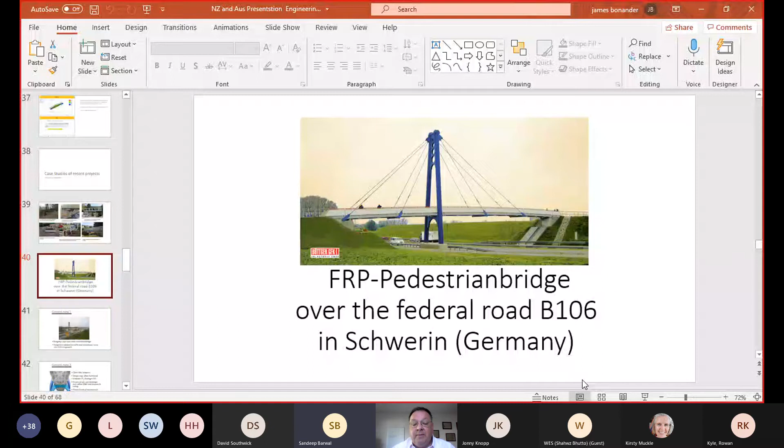What I want to start with is, I want to talk about the use of FRP. Let me go back to something simple. So I'll start here. I want to talk about the use of composite structures in civil uses. What we've been doing with the construction of composites is creating a lot more pedestrian and bicycle paths. And 25 years ago, our partner and founder, Arnie Brutker, started building these bridges in Germany. And what we found is these have become a very, very successful product in that they're very, very durable.

So the benefits of going with the composites is, one, they're 75% lighter than steel. So when you look at construction and handling in the field to build, they're much lighter. They're 30% lighter than aluminum.

They get very high strength. You're talking about 4 times the tensile strength of aluminum.

The shipping costs are quite low. Because it's lighter, we don't need quite the same crane capacities and construction equipment in order to install them.

It also doesn't suffer from the problems that wood, concrete, and steel do. We don't have the corrosion, and we don't have to worry about worms invading it and bug infestations.

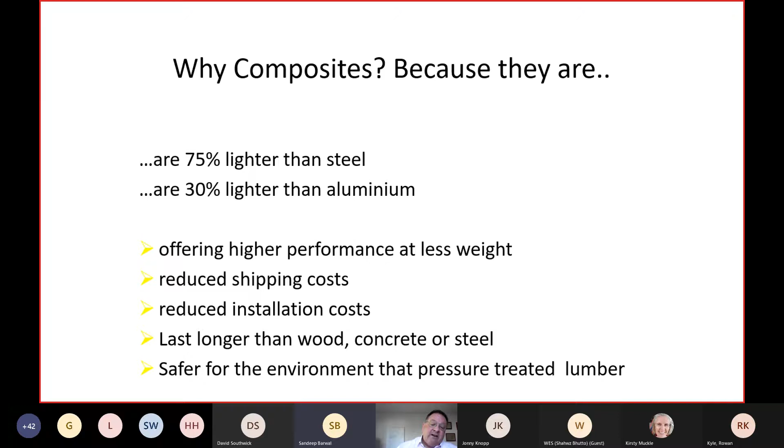So when we look at this, we look at the markets that we go after. These markets include bridges, and we also look at offshore.

One of the great things about going offshore is that since it's non-corrosive, it requires very little maintenance. You're not going to have the corrosion, and you're not going to have the problem of mold that wood has. It holds up beautifully over a long period of time.

In the chemical industry, not being corrosive and not being reactive, they tend to be very effective in places where you have high pH variances and places with a lot of corrosive materials.

We also don't have the problem of forming galvanic cells. So you don't have the problem of dissimilar metals being bolted together and starting to rust, because these break the circuit. That's why they work very well in places like sewage treatment plants.

Also, not being conductive, it's very effective in electric rail because we don't have it carrying stray currents. So it's a very good electrical insulator, and it's also used widely in the wind energy industry.

It's very durable and very light. Lifting the nacelles up onto the top of a 140-meter tower is a lot easier with something light like a composite than something very heavy like steel.

You also find them used now in the cooling tower industry because they don't corrode and they don't rot. And you also find them a lot in other areas where we're starting to use them as reinforcement in concrete for civil engineering and many other fields.

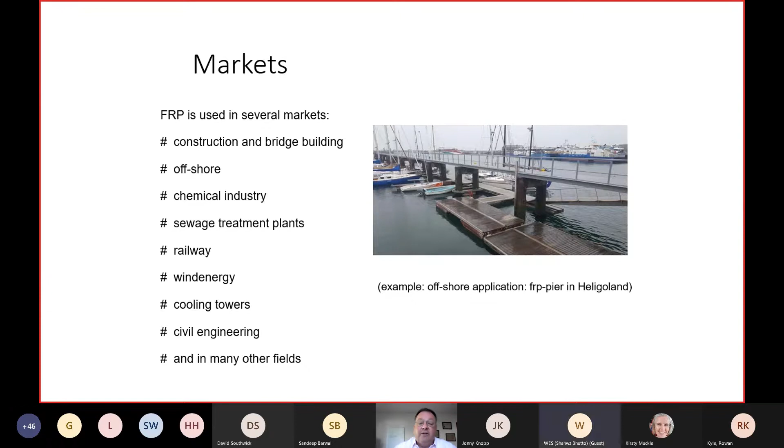A general question here, James: the impact of composites on the environment. What can you see over here?

Well, the best part about it is the United States Forest Service gives you the best description of this. So they did a study where they actually looked at the leachates coming out of an FRP pultrusion versus pressure-treated lumber, and we found a tremendous amount of toxic chemicals coming out of the lumber.

But in order to stop it, we actually encapsulated the lumber in fiberglass to stop the leachates coming out of it. So it's actually a much lower footprint on the environment than, let's say, pressure-treated lumber.

And you don't have the materials coming off that you have in corrosion. In certain alloys, it could be high levels of manganese and chromium that could be coming out, especially if you have a galvanic cell. So in that regard, it has a very small footprint on the environment.

So what we come into is we make pultruded parts. And the reason with pultrusion is it's directionally very strong. It also has very good impact strength.

And it also gives us the maximum use of our properties so we can bring the weight down much lower than if we just made a flat panel that's uniform in all directions in properties.

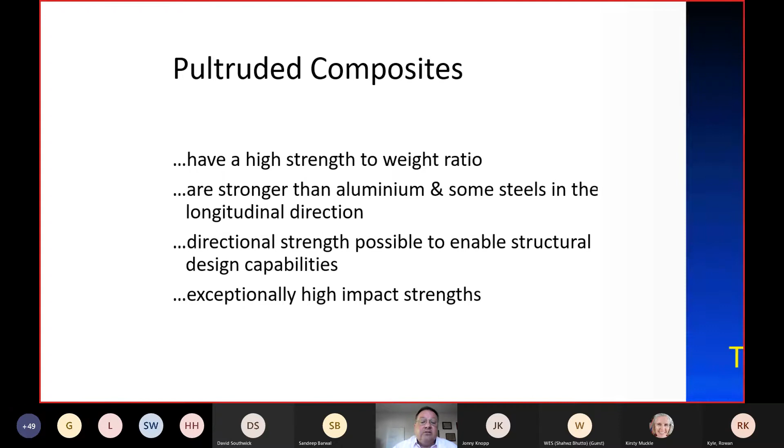So what we do in the process is we start off taking the fibers, and we form them into a stacking pattern that forms a balanced laminate. When we talk about balance, that means there's a line of symmetry through the part so that the part doesn't warp when it cools.

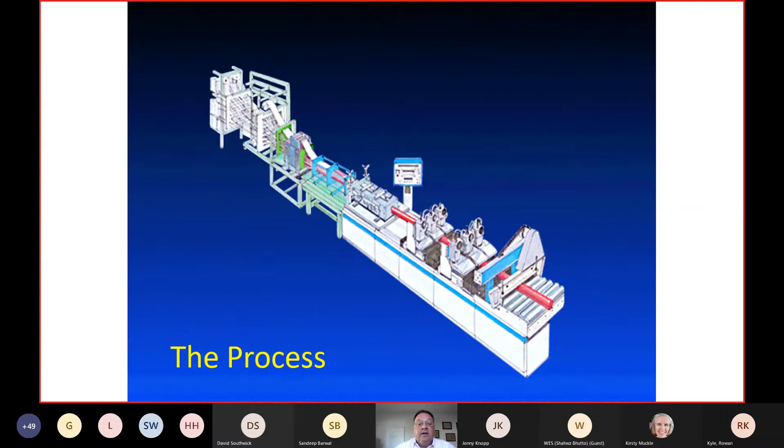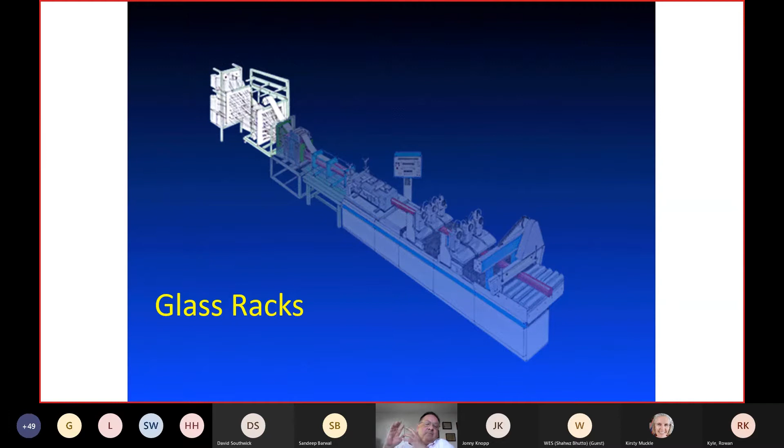From there, it's taken into a bath and saturated, and it goes on. But first we have to build the glass rack, and the glass rack is very important because what we do there is actually lay out the materials in order, and you'll see we usually use glass.

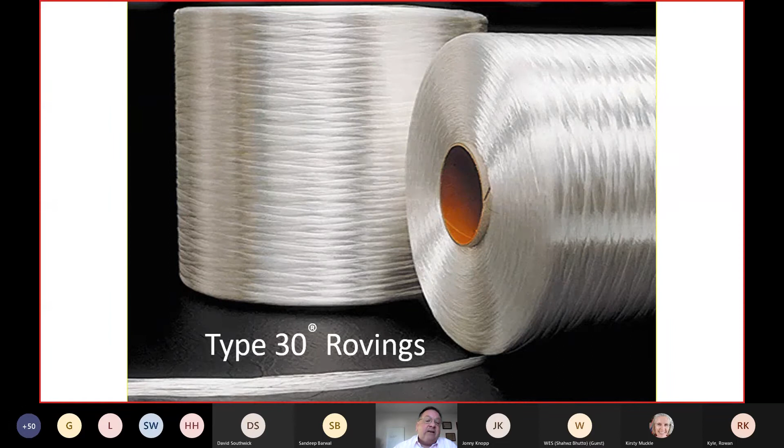We use glass very frequently. You can use carbon fiber, but carbon fiber is conductive, and the risk with carbon fiber is it is a cathode, and it will turn everything else around it, all the metals around it, into a sacrificial anode.

So this is why glass is actually more effective in a civil engineering environment. This is what we call a creel, where we use some pulled glass, and we pull large amounts of glass fibers through. Then we use what we call continuous strand mat, which absorbs a lot of resin and gives us cross-machine properties so that the pultruded part has strength in both the machine and cross-machine direction.

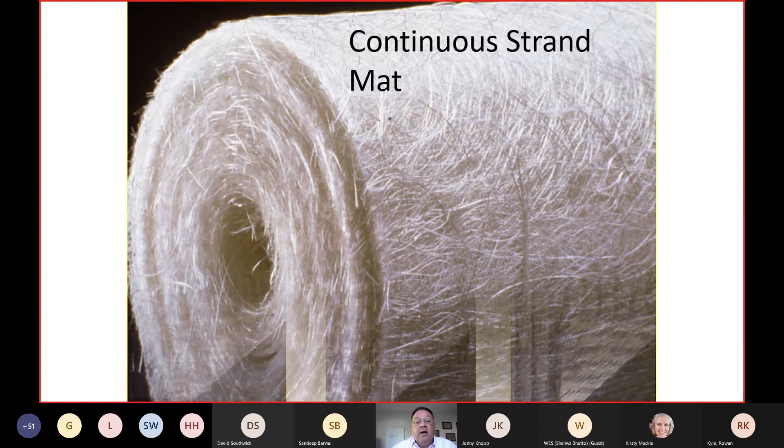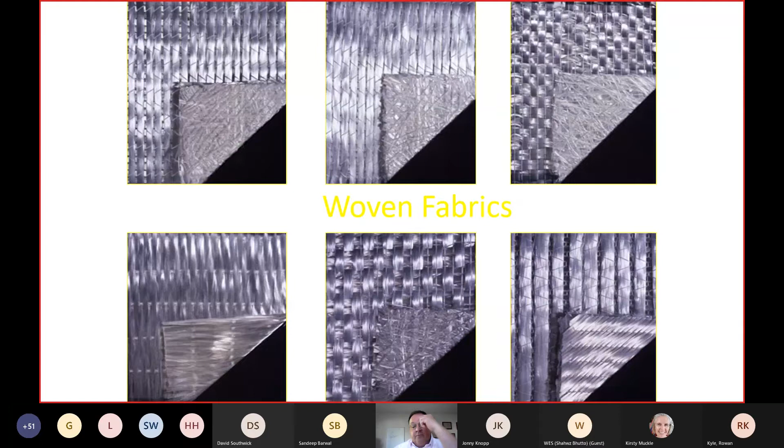We also will, to reinforce it, use certain types of woven fabrics. These could be stitched together biaxial fabrics, and sometimes we use woven fabrics. The difference with a woven fabric and biaxial is that a biaxial fabric has equal properties in machine and cross-machine direction, where woven fabrics are usually about 20% weaker in the machine direction than the cross machine, because the fibers go up and down around as they weave it.

Once you get there, you have the feed-in system, and this is where you start to bring all these parts together into a very nice organized manner. As they dispense the material, they start to line up all the fabrics together so that the material is nicely organized and becomes a very clean structural material.

One of the things you'll notice is on the side, there's a transverse creel letting out fabric. That's because you want to wrap the edges so that when they go through the die, they'll form a nice, sharp, strong edge that is not frayed and damaged, and the material inside is protected from damage. That gives the impact strength, because let's face it, things get hit.

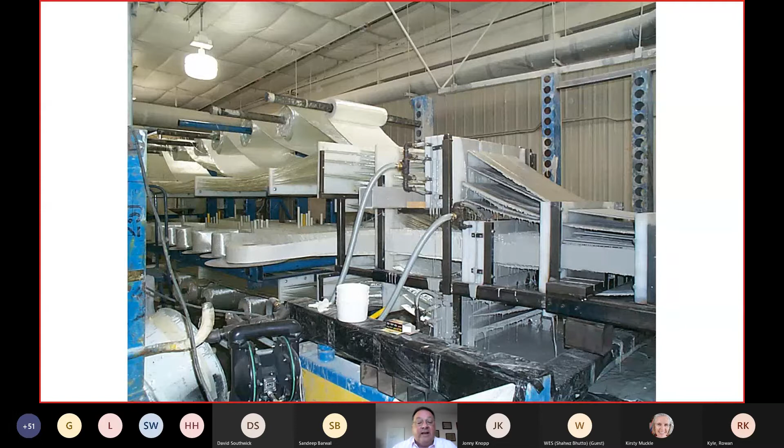So there you have it, the material getting lined up, all the layers. You have the continuous strand mat on one side. You have a surfacing veil to protect it. And then you get into the impregnation area.

This is where we add the resins. The resins themselves are basically a wet process. You put them through and saturate them. You want to make sure you saturate all the way through the fiber, not just coat the fiber, because what you'll end up with is air gaps, and that will make for a weaker laminate.

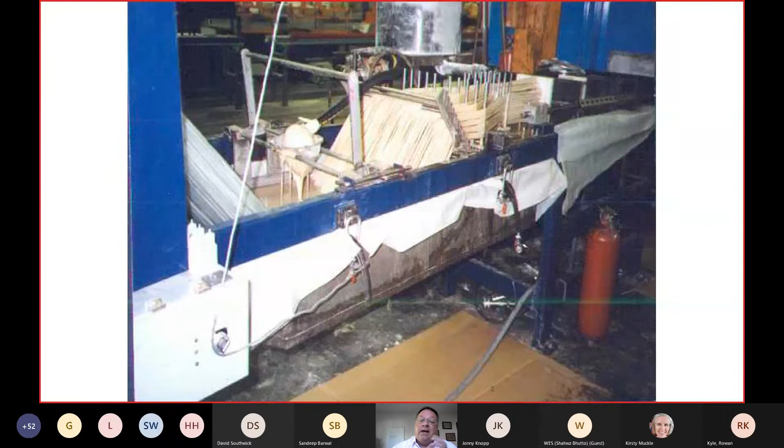Now, when you talk about resins, there's different ones. You have isophthalic resins, which are unsaturated and very good for marine environments and high UV. There's vinyl esters, which are also structurally very strong and excellent for a highly corrosive environment. Modar is a new resin developed in Spain, and this might be good for New Zealand because it's excellent for high UV, far better than a lot of other resins.

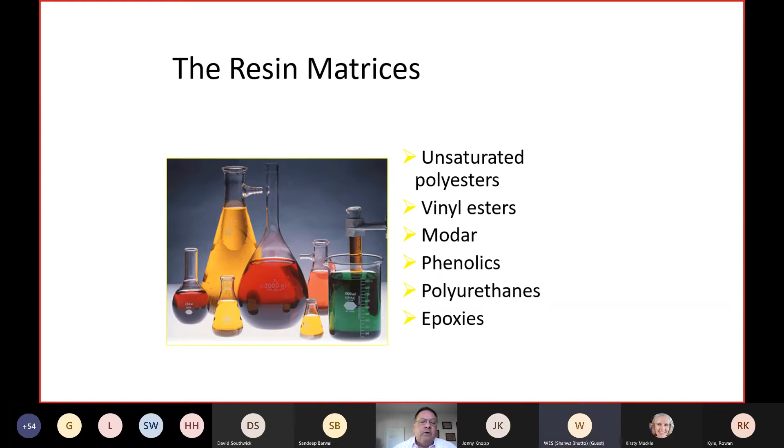There are polyurethanes, which are very tough; phenolic, which is extremely flame retardant; and epoxy, which is structurally very strong but very weak in high UV. One of the things is that we put aluminum trihydrate into the resin as a flame retardant, so all parts are always made to be flame retardant.

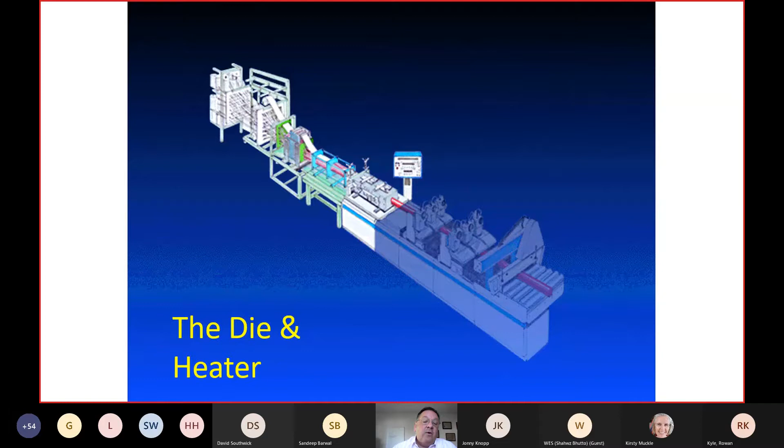Then you have what we call the die, and the die is changed based on the shape you're trying to make. It's very important that the dies are also heated, because you want to cure the material in the die to the shape you're trying to create, and you have to control that temperature. Otherwise, you'll either end up with a soft part or a burnt part, so thermal controls on that are very important.

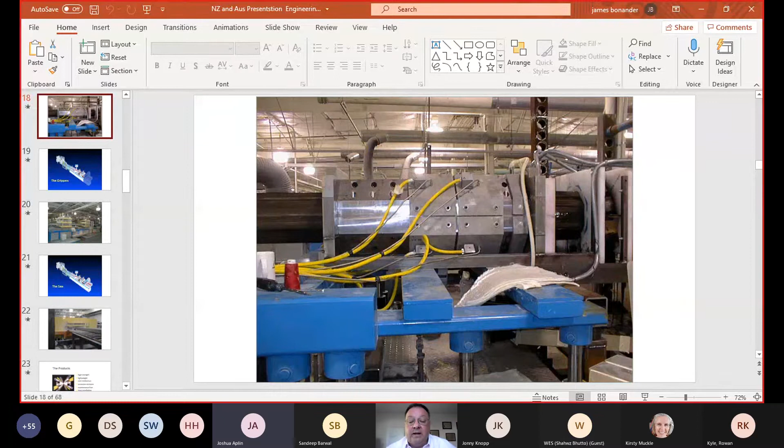So what we talk about here is the mechanical properties: 300,000 psi, or about 2.1 gigapascals, is the tensile strength of glass. You have a modulus of the glass fibers of about 10 million, or about 70 gigapascals, for the modulus of the fiber itself.

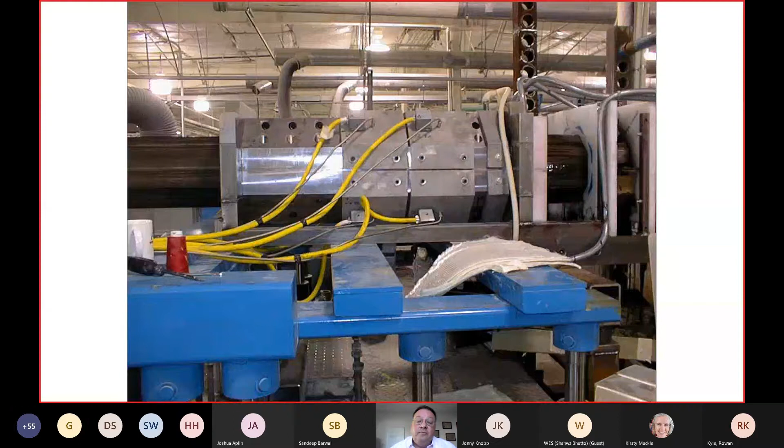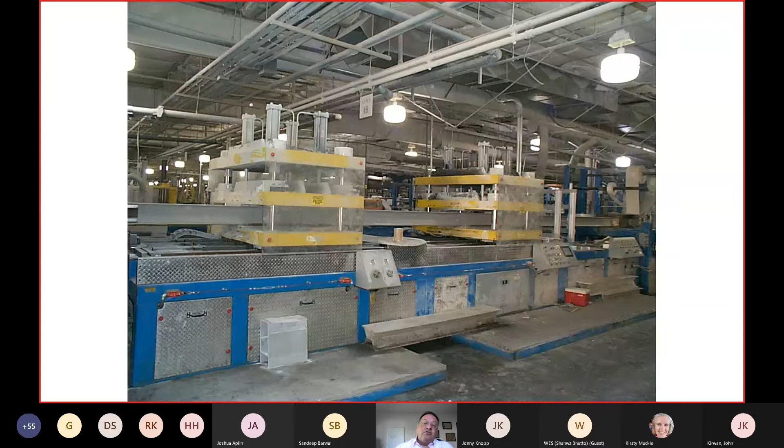Now going on, we talk about the grippers. The grippers are literally why pultrusion has the name pultrusion - this is the part that pulls the part through. As it's pulled out of the dies under tension, it cools, and this is where we make the part straight. If we didn't have that, there's a very good chance the parts wouldn't be straight. Having the parts under tension while they cool after being reacted inside the dies is critical to make sure you have a dimensionally accurate part, without a lot of twisting or sagging and other nasty things that happen to parts left to their own.

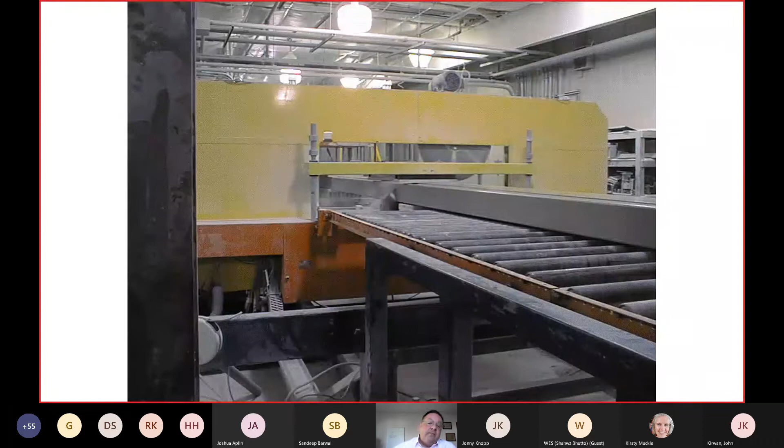Then we get to the saw and we cut them off. This is basically what's really nice about it - when you order the material, we literally just pull it through and cut it to the lengths that you need. This material will come through the machine at anywhere from 0.5 meter per minute to 2.5 meters per minute, depending on the wall thickness of the part you're trying to make. They can pull it through and cut it off very accurately right here in the factory to the lengths you need, so there's no waste.

Once we do that, we make these parts. They're very strong - we're talking tensile strengths in excess of 700 megapascals. They're light - a specific gravity of only about 1.85. They're not conductive and they're non-corrosive. This is really great if you have a problem with galvanic corrosion, especially in a paper mill, a sewage treatment plant, or any type of chemical process plant. This really helps prevent corrosion, and also helps around electrical components by not conducting a stray current.

When we say maintenance free, one of the big beauties of this is you can order them in the color you need - you don't have to paint them afterwards. So if you know you're going to be building a bridge and your municipality won't have money for maintenance, if you pigment the pultrusions, they'll never have to paint it, because the pigment goes all the way through the part.

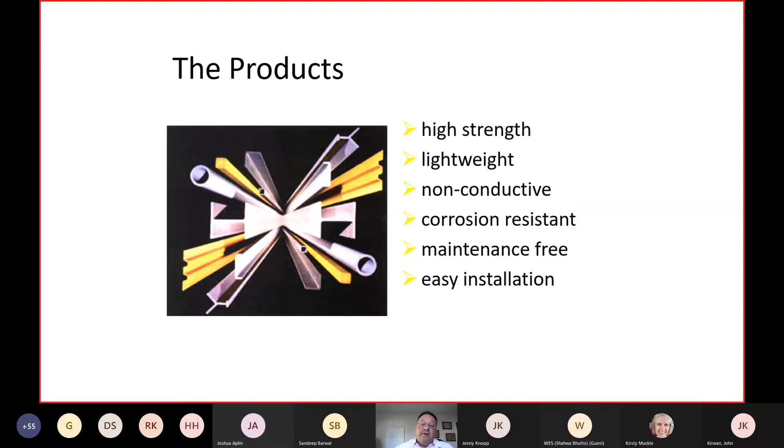They're also very easy to install. However, I'm going to tell you - you have to be a little careful when it comes to drilling.

But what we do in the applications - this is where our parent company, BGL Karlstad, was happy to supply these examples. This is a sewage treatment plant outside Würzburg, and this is really great because we've been able to put the decking in around it. We put the handrails in, and the ladders and staircases are all FRP. Those components, which are necessary for personal safety, will now not corrode. They won't conduct a stray current, and they also hold up very well through the winter months in Germany. It gets freezing weather there, and nowadays it also gets surprisingly warm. It's also exposed to a very high level of corrosive environment, so this makes it last a very long time. This installation is 22 years old without maintenance.

James, got two questions from Chan over here, mainly related to UV. Firstly, you mentioned ISO and Modar are good for high UV conditions - so are there test results and in-practice evidence, which he is asking for?

Yes, if you want, there are some excellent standards. There is testing to a DIN standard, and to another one I have to look up, but if you go to the chemical companies, they have a standard test for UV exposure.

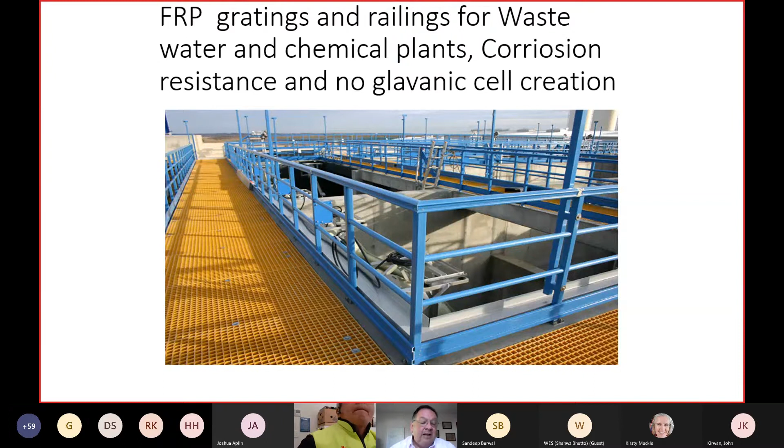So those are the things that happen - slightly different drill bits are needed, but the normal woodworking and metalworking drill bits are a no-no.

This is a section of electrified railway outside of Hamburg, where we installed composites alongside the tracks. The reason it helps is, one, we used gray because there's no maintenance. But the other part is it doesn't conduct electricity - there are no stray currents. And it also dampens vibration.

One of the problems with putting up metal fencing around railroad tracks is they rattle a lot. What's nice about FRP is it has a slightly higher dampening coefficient, so it tends to kill the vibration and dampening - making it a lot quieter than metal fencing.

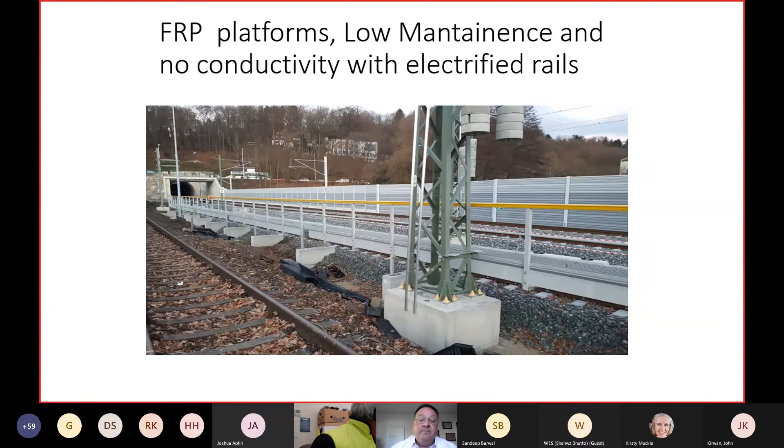We also make FRP ladders, and what's really great about these is if you're dropping them down into a hole, they're a lot lighter and easier to install than a metal one. The other nice thing is a lot of these places are usually in very corrosive environments, so we know they'll hold up well over a long period of time. That's what makes them very useful, along with the grating underneath, which is also FRP.

Now, a lot of times you'll run into the problem of you have a very, very conservative local government that isn't comfortable doing an all composite bridge. We build hybrid bridges, so we'll put steel struts and beams underneath the bridge, and then use a composite deck and composite railing. And the fact is, what normally goes bad on one of these small pedestrian bridges is not the beam below, but it's the deck and the handrails.

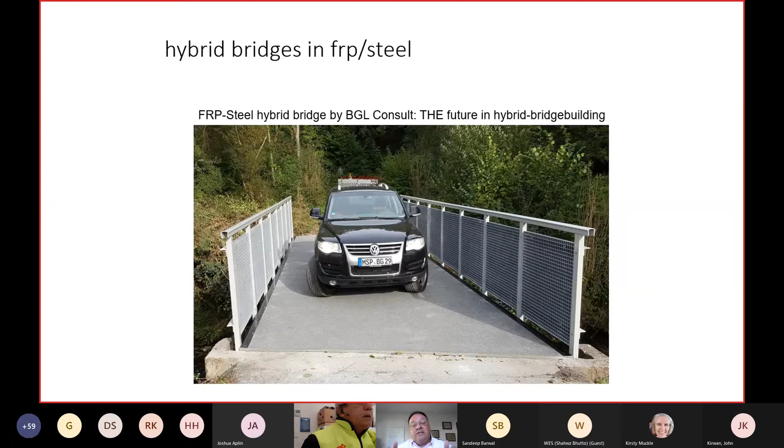In a lot of areas, we use these composite bridges in farm environments where cows cross. And the funny thing about it is wooden bridges rot very quickly. The metal bridges corrode because of all the animal excrement that gets on there, which is very, very corrosive. But the composite bridges hold up just fine, and they clean up very easily with a hose.

And the other thing that's nice is in the surface, we can create a sand tread. So if you want a sand tread on the surface, we can build a sand tread onto the decking when we bolt it in. So you can make sure it's a nice grippy surface so people don't slip and fall down. And that's also usually very helpful in a lot of places, especially with bicycles, which are making turns probably too fast.

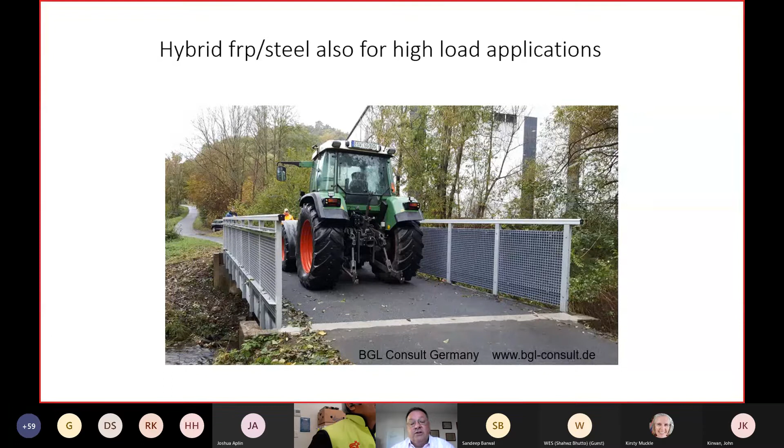You put it up. If you know the city's never going to have money for maintenance and to keep up the infrastructure you put in, which is the American plague, building composite ones like this in FRP is very good for cities that get federal government grants for building, but then don't have the budget to maintain it. And that's the advantage of FRP, because there is no maintenance to follow up.

Oh, sorry, James. An early question over here from Sandeep: can fiber composites replace steel rebars as steel reinforcement? Yes, there's two companies now doing this. Originally, the U.S. Army Corps of Engineers did experiments with it. It worked. It was quite successful.

And in places like the UAE, you'll find it being used more and more in construction because they have so much saline content in their aggregate that when they were building a lot of the earlier city buildings, the buildings were exploding on their own because the corrosion was so severe. The concrete was literally chunking out on itself. So they had to spend a lot of money to try to wash the salt out of the aggregate.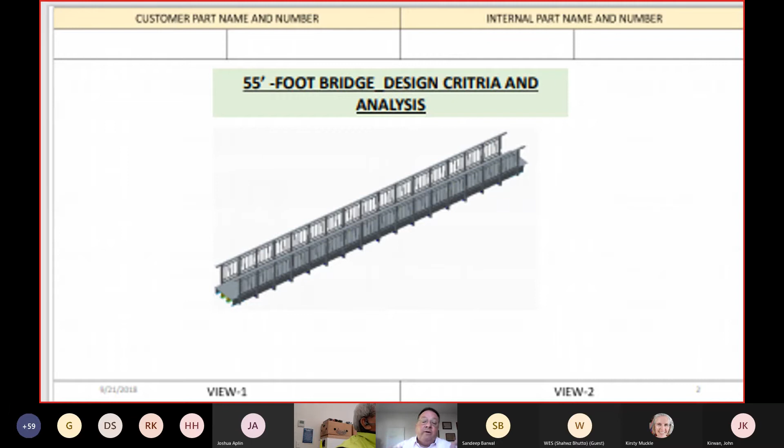And the biggest problem that happens to these bridges is not earthquake or foot traffic, but debris in the river building up against the bridge and then creating a very high pressure against it. So even though it's a 55-foot bridge, it has to be built for a 40,000-pound lateral force on it. And that's because of the problem of debris building up on it when the river floods. And so we have to take into account a series of constraints. Some of the constraints are how we drill it, how we bolt it.

And this is where we get into one other thing. Because it's not as hard as steel, you really want to use a torque wrench, all right? Then this is where we get into one little big difference. In the direction of the fibers, the material is extraordinarily strong, but transverse to the fiber, that's at its weakest, and that's how the bolts go in. So we have to make sure you use a torque wrench, and make sure there's always a proper washer stack on your bolts as you put them through so you distribute the load effectively.

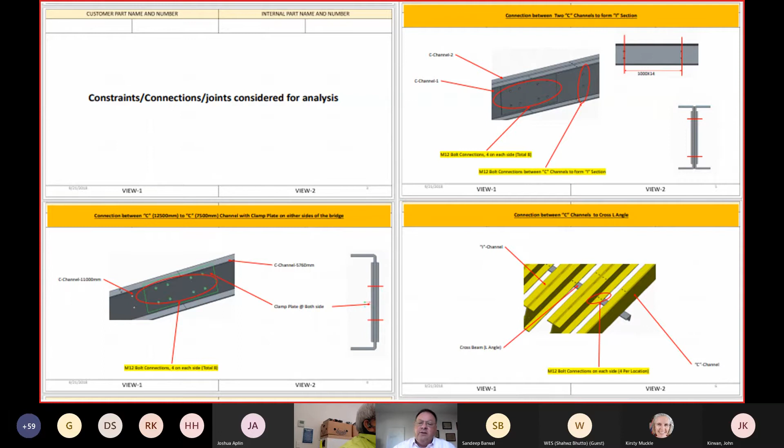All right. Then on top of that, we take 2 C channels and we form an I-beam. And we bolt those together. And then we make sure that we do shiplap joints. We don't just let them all line up in the same place. And so what we then also look at is how we attach the handrails, because that helps create a truss structure. So we're not just building a flat beam. By using the handrails, they contribute to the strength and help form a truss. And we look at how all these parts bolt together.

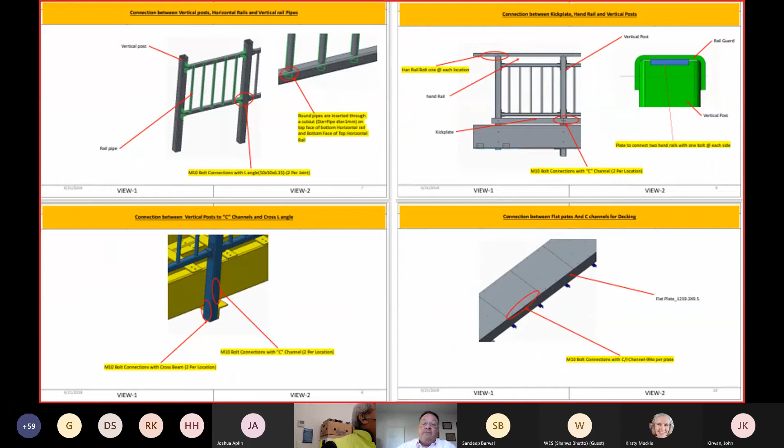And this is really one of the more challenging parts about it, because you want to not have to build a separate truss and then handrails. You want to be able to integrate all these components together to be as efficient as you can. And so there are a couple of things that we look at here. One, we want to look at the downward load when there's a lot of people on these. These bridges have to support 4 horses. We do have Amish people in this area of Pennsylvania where this was sent. And we want to look at how it holds up also if there's a large crowd on it.

Strangely enough, the worst stress these things normally have is when you have a huge group of people standing around sightseeing on it. All right. And if you look at some of the ones we do in urban environments, such as the ones we did in Hamburg, which go over the street, generally the most stress on it is when there's a parade, everybody wants to go up on it and watch the parade. And that's when you're at peak load. Now, there are two different standards that we work with, depending where you are. There's European EN 13706 or the American AASHTO standard. And I have to say the Europeans are at least 40 years ahead of us Americans.

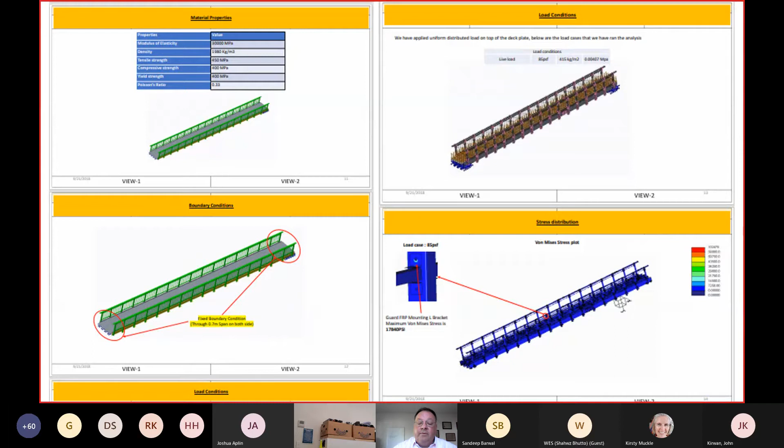Now, we look at the problems of two other things. One is torsion, and we have to also look at the frequency of vibration. We don't want these things vibrating to the point that we shake people off. But we also have to look at the torsional effects based on the seismic environment that you're in. And usually we have to build to 5 times the seismic force in composites. Oddly enough, they don't have that with steel and concrete because people are very conservative. So we have to really build for a very high seismic event.

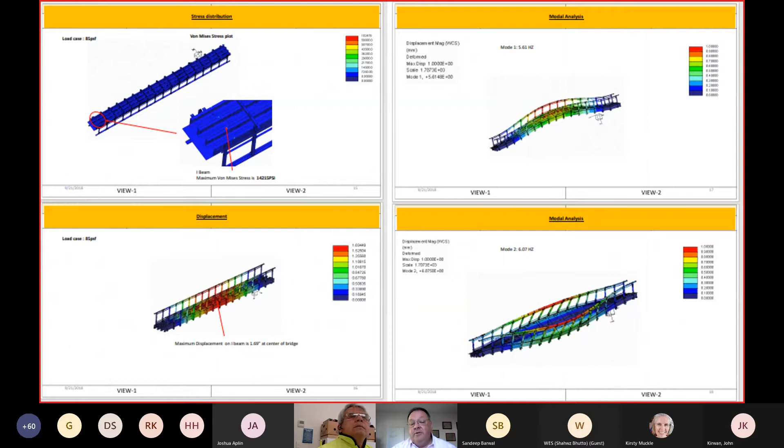Fortunately, this stuff does great in high seismic environments. And the reason is FRP has high damping compared to metal or concrete. You will not ever get the amount of damping out of steel and concrete that you can get out of FRP. And the other problem is not every FEA program will work. We use Creo, which is very popular in the automotive industry. It also is very effective with anisotropic materials and quasi-isotropic.

Quasi-isotropic means that in one plane you have uniform properties, but perpendicular to the plane you have a very, very different set of properties. Anisotropic is where the properties are different in every direction. Most pultruded beams are highly anisotropic.

And because of that, STAAD, which is a very popular FEA program for civil engineers in America, crashes. And it's not very successful trying to run the analysis with that. But with Creo, we can do it without any difficulty.

As I said, we have engineering standards. There's the American standard, which is the AASHTO 2018 standard, which I would actually call somewhat obsolete. It's about 25 to 40 years behind the Europeans. The European standard, EN 13706, is based on the DIN standards, and it's probably the most current and modern standard for building with composites there is.

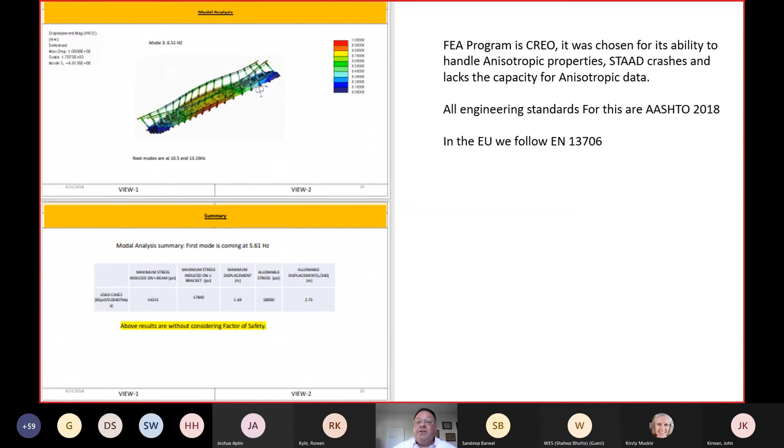The other one we get into is a severe amount of rust. People don't realize this, but the acid rain they have in Europe, because of so much coal burning that has gone on, has now left the steel rusting away to bits. And so what we do, we can build the entire bridge right next to it. And instead of pouring traditional concrete abutments, we use what's called earth screws. They look like giant wood screws that are 3 meters long. And we have a special hydraulic machine that can drive those things in. And in less than 30 minutes, we have an abutment in place to put the bridge in.

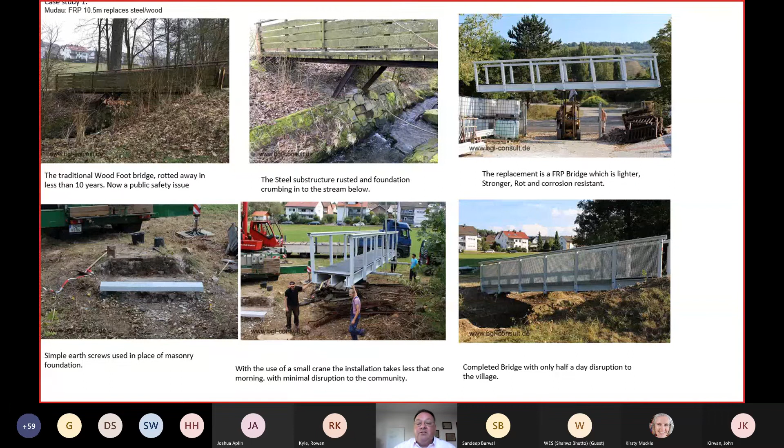A lot of our infrastructure is built around cars, but it's not safe. As a boy growing up in New York, weaving your bicycle through 6 lanes of traffic on Broadway is not a safe thing to do. But riding on a country path dedicated for bicycles is very safe. Nobody worries, nobody needs a helmet, and they all seem to be safe.

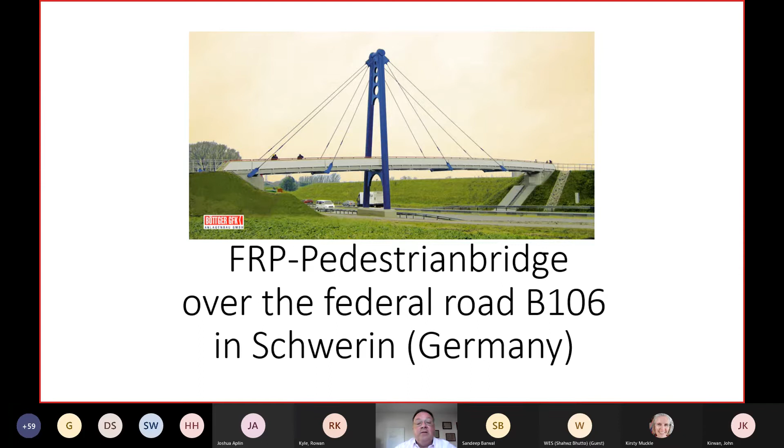This is one of the biggest bridges we've done. And what makes this thing so special is we had a huge amount of restrictions on the installation. The B106 out of Schwerin is a very busy highway for commerce. And we were given very little time to disrupt the road. We only had a couple of weekends where we could shut down the highway. And the most difficult part of this project was getting that center tower you see standing there, where we hang the suspension cables from. That tower is made of steel. It is probably the most problematic thing in the entire installation.

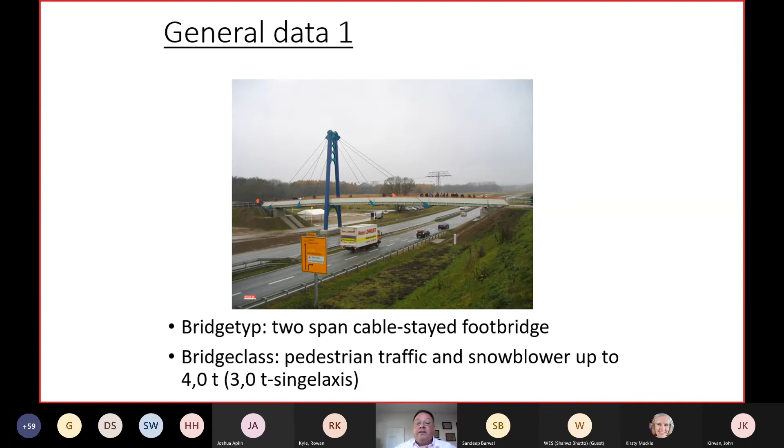So this is called a two-span cable-stayed bridge. It's a pedestrian bridge. We have a 4-ton load, 3-ton per single axle load requirement. And yes, they do drive snow blowers up here to clean these. If you look on Google Maps, you'll find a place called Schwerin, Germany, and you can see it today where it crosses the B106.

Our engineering office was FormNord. They helped do it. The project manager was Boettger GFK, which was the founder of BGLTI. The structure calculations were done independently by 2 other engineering firms to confirm it, and external testing was done by Woerner and Nordhues. The reason for this is the Germans do not allow you to validate your own calculations, which is smart.

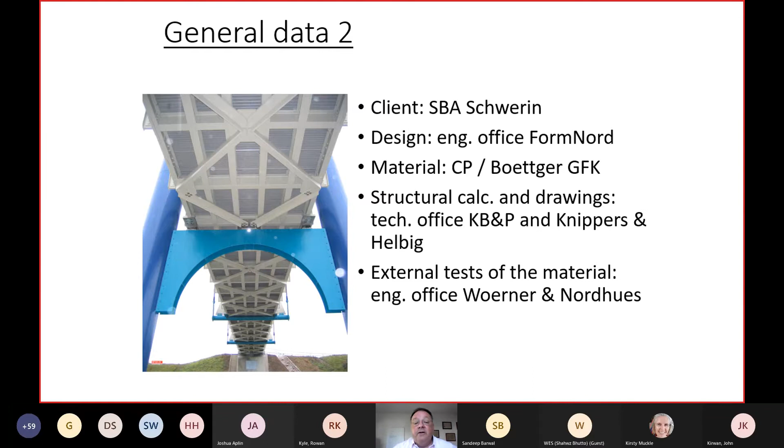So, materials that we used originally came from... hello? Hey, yeah, just another question over here from Chen. What is the range of damping percentage for an FRP structure? Are there any calculations done on that? Yes, you actually can do it. It's done with rheometrics. Normally we measure it in terms of what you'll see called tan delta. And generally it's 0.03. In comparison, steel is about 0.001.

Okay. And another question from Chen, that is, have any tests been carried out on FRP pultruded sections related to ductility under transient cyclic loading, typically for seismic events?

Yep, absolutely. As a matter of fact, University of Milan, University of Hamburg, and almost all the manufacturers, if you go to look at the data from Creative Pultrusions, or you go look at the data from any of the major pultruding companies, cyclic loading tests are very, very common and required. Usually 100,000 cycles is the standard test, and they require less than a 1% loss in mechanical properties.

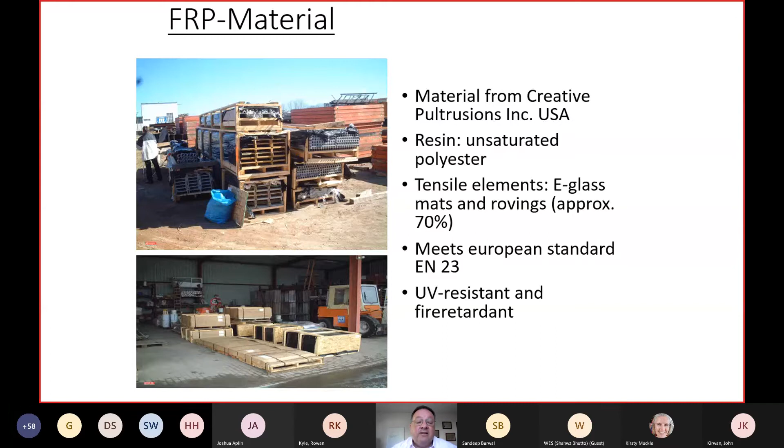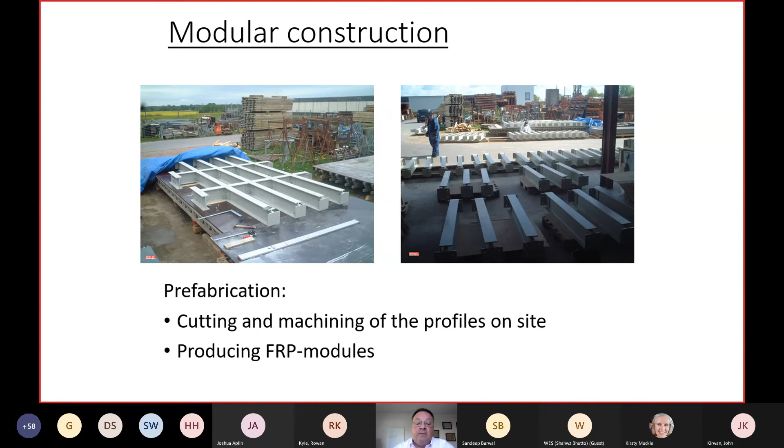So what we do here, we prefabricate the entire bridge next to the site. We don't actually fabricate the bridge like they normally do. And the reason we can do this is the parts are light enough that we'll be able to move them into place. So next to the site, we'll do our cutting, machining, and any of the FRP modules that we need to make. And so we build up a framework and we build the regular beam structure.

And if you look at it, it looks very much like a traditional steel beam structure. So it doesn't look that much different. If you look at the bolting assemblies, the shape of the beams, they look very much like a traditional steel construction. It's not that different.

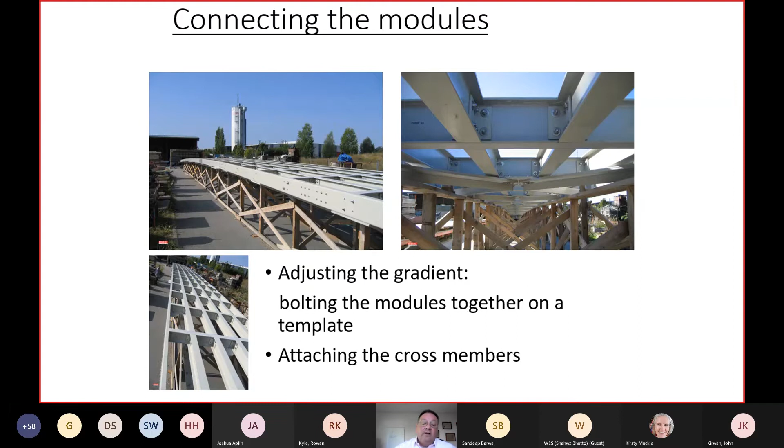But the difference is this is going to be 1/5 the weight of the steel, and it's also considerably stronger. Now, here's the interesting thing about it. Because this material has a little bit more flex and more dampening, it's a little bit more forgiving during the installation.

So we always use naval stainless hardware. And the reason is that 300 series stainless is a little too ductile for our hardware. The Europeans do not use galvanized bolts. In the United States, they require that you use galvanized bolts. I personally will tell you this 400 series stainless that they use is actually far superior to the galvanized bolts.

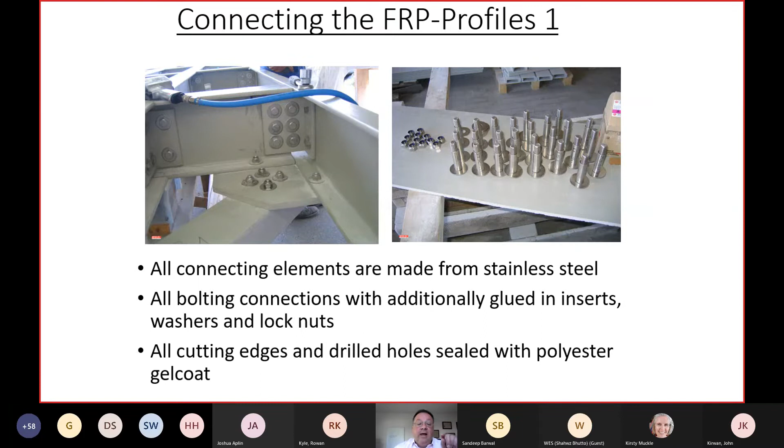All right. So after we drill the holes, we always seal the surfaces with gel coat. This is where we mix up the materials and we make the adhesives when we glue some of the beams together.

You have to remember this bridge is 23 years old now. So back then, this was the first suspension composite bridge in Germany. So they wouldn't let us just bolt it. We had to glue all the beams together. All right, now we know that's overkill.

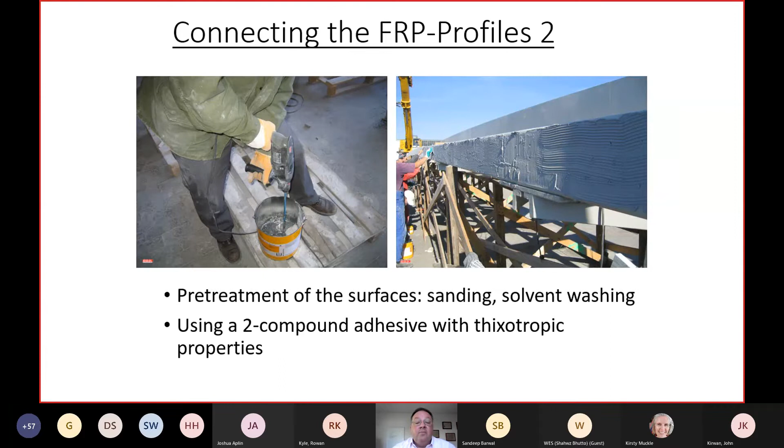Then on top of that, we have a very strict quality control, and we had to have a third-party engineering firm to do the quality inspection on site. And also, of all the materials that we had, they took samples away and did their testing at an independent test lab. And they tested the strength of our glues, the strength of our beams, the bolts, even the concrete that was poured for the abutments. And they tested all the steel.

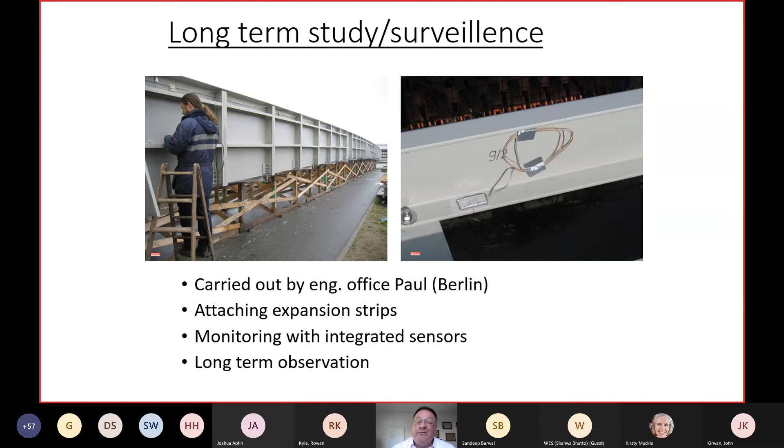All the engineering work was carried out by the Paul group. We even installed sensors - you can see them here. At this time, being the first composite suspension bridge in Germany, this was required to have sensors so they could detect if there was ever going to be a problem. We built a series of sensors into the bridge that could tell you if the bridge is starting to fatigue or not. So we have the monitoring system put in there. It has been monitored now for 23 years, and it hasn't needed any maintenance.

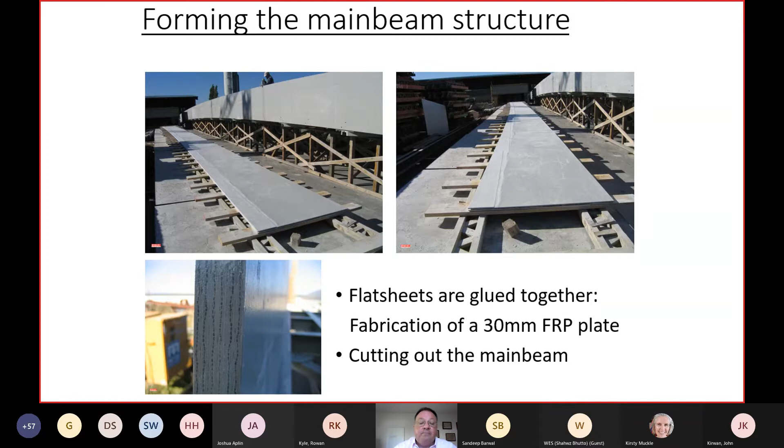What we have here is a cross-section of what the bridge is going to look like before the deck is put on, and this is what it is. It looks very much like a traditional metal construction, but this is the first fabrication. So you have the standard I-beams going lengthwise, and you have your cross supports built in, along with a reinforced sidewall to make sure that the pedestrians don't fall off.

It's also designed so when the snowblower goes through, it doesn't dump material onto the oncoming traffic. This is designed to make sure that whatever mess there is stays on the bridge and doesn't go crashing down. It also doesn't drain onto the highway to create any type of visual problem for trucks getting doused and losing their visibility.

James, question from Nathan over here, and I think perhaps you could highlight some of the examples from Windstrip - can these composites be used for telecom tower structures? Yes, for matter of fact, they might actually be better.

The reason is a lot of the housings on telecom structures are FRP because these are radio transparent. What really could help quite a bit in a lot of cell phone tower applications is if you were to use more FRP, you'd actually create less interference and echoing on the radio transmission. So by using more of these FRP parts that are radio transparent, you might actually improve the quality of the transmission and help reduce the number of dead spots from the transmission from a tower. The other thing it also does is if there's a stray current, you'll protect the electrical components from any stray current going up.

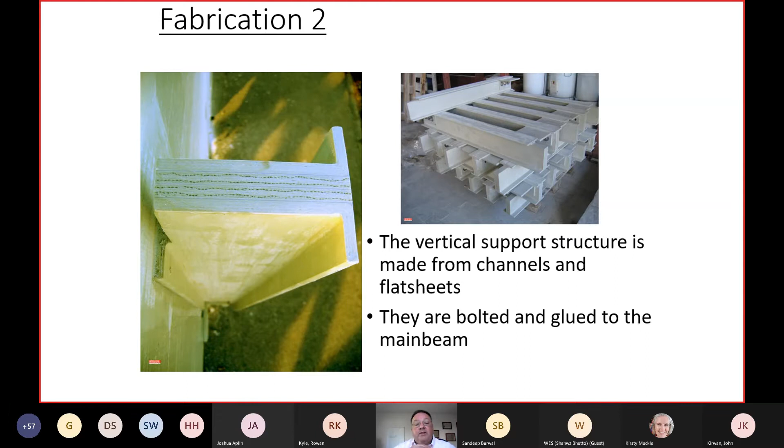The vertical support structures are made from channels. We take flat sheets and L sections and glue these together, then bolt them together. These are then glued and bolted to the main beams, and they become very critical as a component. You're talking about 30 millimeter thick main beams, and the secondary beams are 10 millimeter thick, in the upper and lower assemblies. This is how you form a giant I-beam, and this is how these structures are seen.

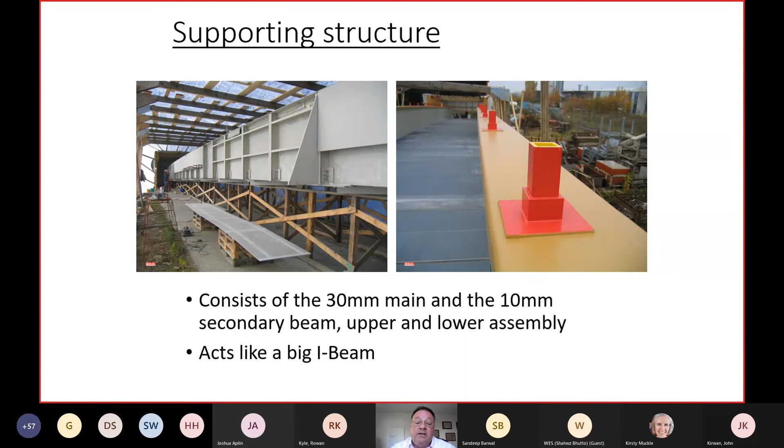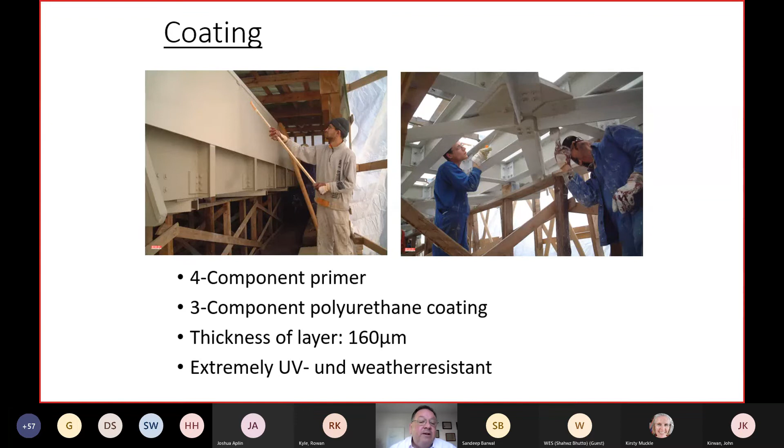You'll see that we can do this on site, and here we had to create a temporary building because the weather is so miserable near the North Sea. So we have a special primer that we put on there, and a special urethane coating. It's 160 microns thick, which is rather thick, but it's very good for weather resistance. One of the problems dealing with the North Sea in this area is there's a very salty wind, very high winds, and the weather can get very rough. So these types of coatings they thought were very necessary. Today we know that we don't really need them, but 23 years ago it was thought very, very critical that we do it this way.

And then the last step in the fabrication - this is where it becomes, to me, one of the more interesting things about this.

The bearing parts of the structure and the installation of transportation, handrails, all this stuff can be done and installed on site. But what we can do here, if you look at this bottom piece, before it even gets moved, we can put them together into two parts.

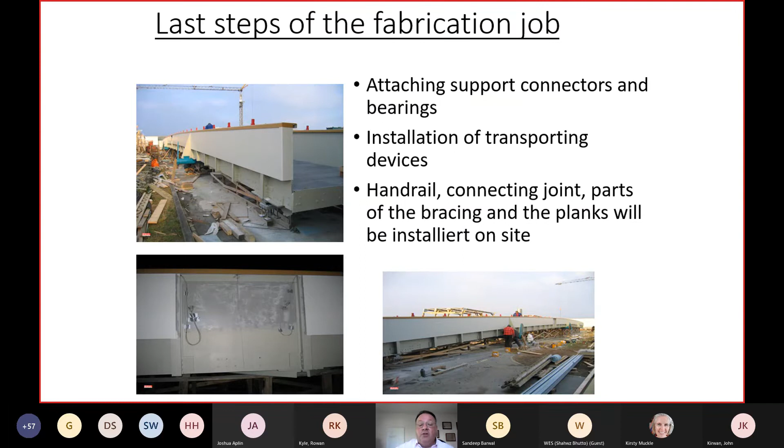One was 19 meters long and the other is 26 meters long. What's really great about this is there is no way you could build this out of concrete and roll it into place on the back of a truck. It just wouldn't happen. And if you did it in steel, it would be a very difficult task to try to lift that into place. So that's the first part of it.

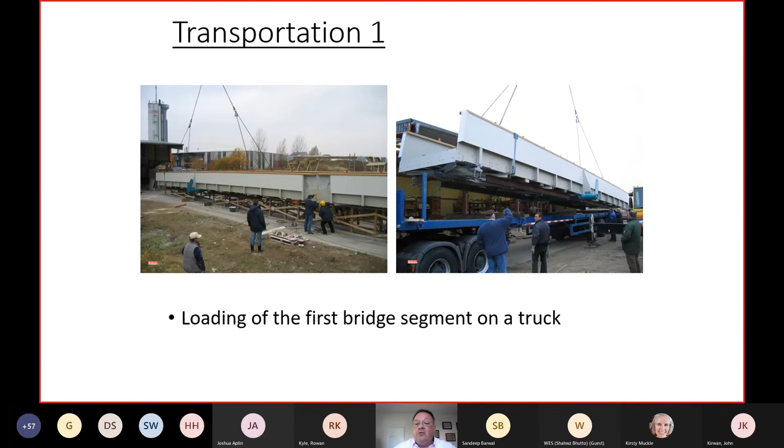So you couldn't do this in concrete and you couldn't do this in steel, but we can just roll it into place, take it down the road, and it is very easily lifted up and installed.

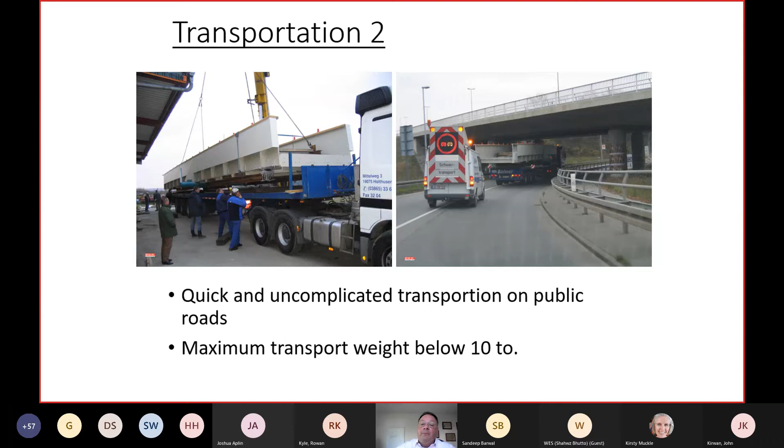What happened with us is we only had 2 weekends where we could actually interrupt the road, and we had to do it at night. So on the access road, we lifted up the 19-meter section, and we were only allowed to disrupt that roadway from Friday sunset until Saturday sunset. We had to install that entire 19-meter section in 1 weekend, but we were only allowed to disrupt the road underneath for 1 day.

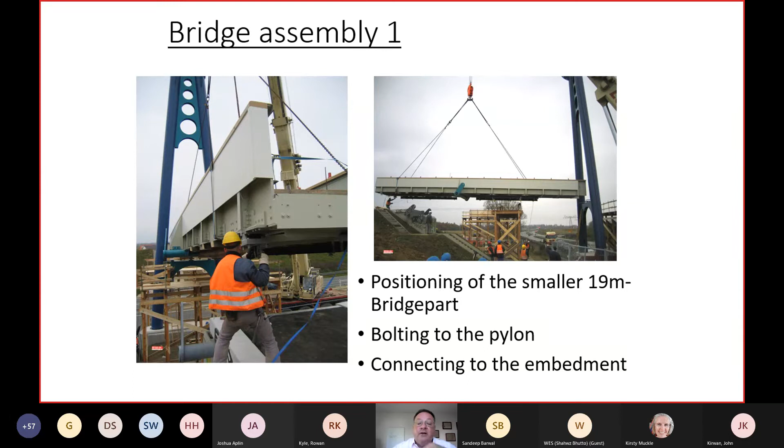So that structure you see down there, that went up on a Friday night and had to come down on a Saturday morning. All the rest of the installation was done with the roadway on the access road being fully usable.

The second part was the 26-meter section. This had to be done at night because that went over the main highway and we weren't allowed to disrupt it. And the supporting structure we built couldn't block the main road.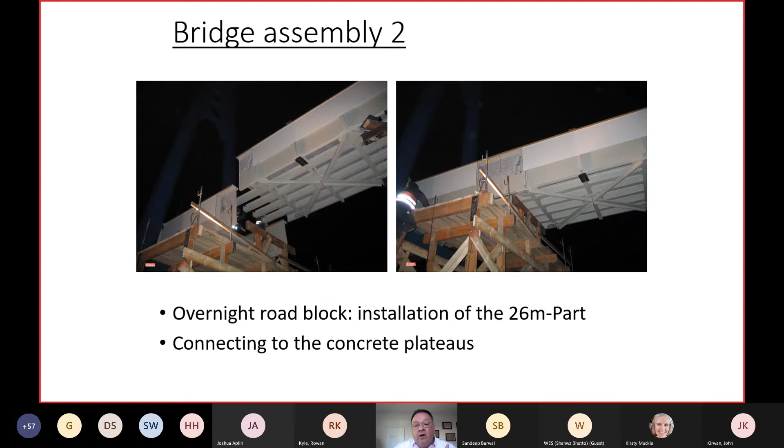So we had to come in on a Friday night, starting at 10 o'clock at night. We lifted the parts in, bolted it all up. And by sunrise, the part was completely bolted together.

That's Arnie Brutker, our founder. And a funny thing about him, I think he's happier out there in the pouring rain doing that than putting him in an office. He absolutely hates sitting in an office. He can't do it. But he'll gladly go out in the middle of the muck and the rain and build. I think an office for him is just horrible.

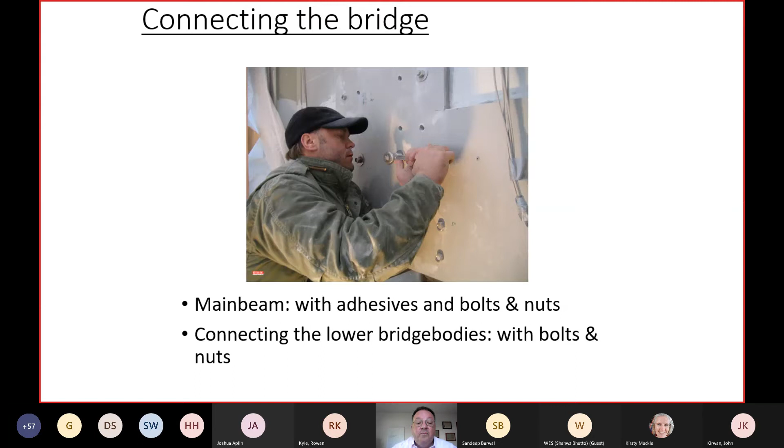Whereas before, you'd have to ride quite a long distance on a bicycle and have to get out into the car traffic. This encourages people to live a more green and environmentally friendly lifestyle, because now cycling is actually faster than driving a car.

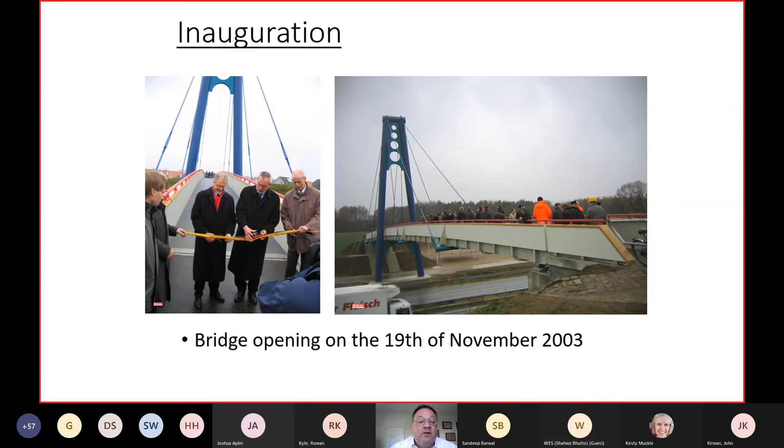So after 23 years, there has been no maintenance done on this bridge. It has not had to be painted. It hasn't had to have any maintenance.

It only took 2 weekends where we had to disrupt the traffic to put it in. And because of its lightweight, we were able to do a very fast installation. One of the beauties here is, if your city has the money to build it but doesn't have money to maintain it, it makes a lot of sense to build with materials that aren't going to need much maintenance. So this is where it becomes very advantageous.

All right, Jim, 2 questions over here. One from Johnny: are there composite cables being used over here as well, or is it just steel cables? These are steel rods.

Okay, the German government back then wouldn't allow it. Today we can get carbon fiber rods, but 23 years ago the German Building Institute didn't allow it. Now they're allowing us to start using carbon fiber rods. That only started a few years ago, but 23 years ago we had to go with steel rods.

Those aren't cables, those are steel, high tensile rods. And the second question, from Kyle: long, lightweight structures can be prone to dynamic wind loads. What wind loading analysis was undertaken and what was included in the design to mitigate these effects?

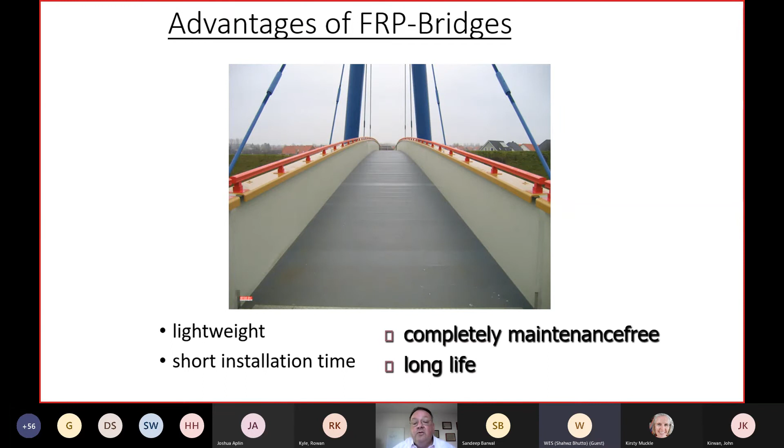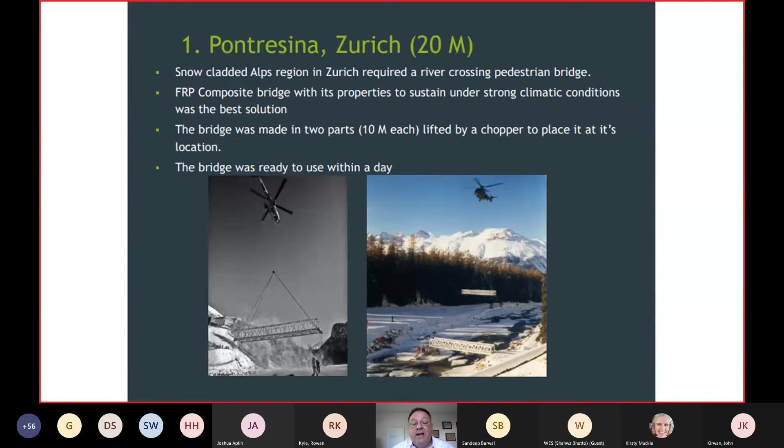This is actually an example of, a lot of times you want to build bridges out in a wilderness area, and it is not feasible to go and schlep the material in. And if you have a lot of wonderful nature trails that need bridges, they have to be flown in. Because we can do composites, they're light enough that we can fly them in. What I can tell you now that I've learned, if you want to do high altitude and decent loads, a Russian Mil-26 helicopter modified by the Indian Air Force can deliver bridge sections at over 5,000 meters. I didn't know that, but only American helicopters couldn't go much over 4,000. Neither could the French ones, but the Russian Mil-26 can lift a bridge segment and deliver over 5,000 meters.

This is my favorite example, the Bienenwerder Bridge. This has a kind of wonderful story behind it, because environmentally, in the current day, and the Green Party being very big in Germany, and everyone talking about protecting the environment, this is a bridge built with environmental concerns in mind. Oderbrücke is an area where it crosses the Oder River from Germany to Poland, and there are nature preserves on both sides. There's a lot of wonderful ground nesting birds and storks in the area, which are really critical to the environment. Also, storks are such an important part of German and Polish folklore that much of the construction had to be done in the winter months before the storks migrated back.

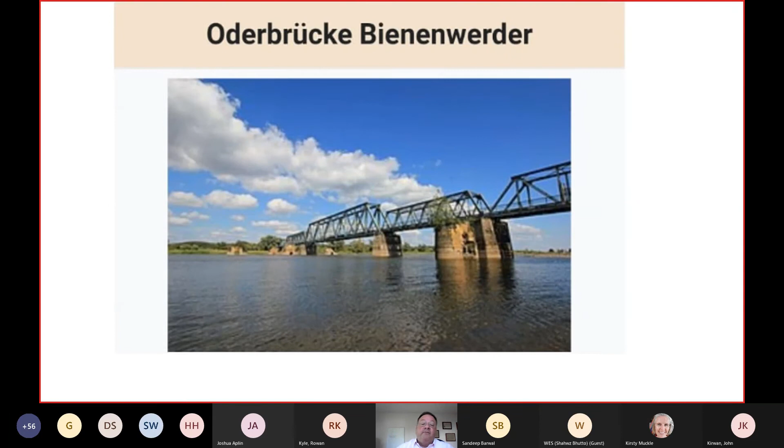So this bridge has kind of an interesting story. It's 338 meters long, originally built in 1918. It was destroyed by the Germans to stop the advance of the Russian army in 1945. The DDR rebuilt it in 1952, and then the bridge basically fell into disrepair because it's not big enough to hold the loads of modern railways. You can't put double stack container cars onto the freight trains going in there. You can't send the new modern German double two-tier passenger trains through. The rails themselves were made from a less than good quality steel back in the time of the DDR, so it's not the strongest steel you could use for making rails.

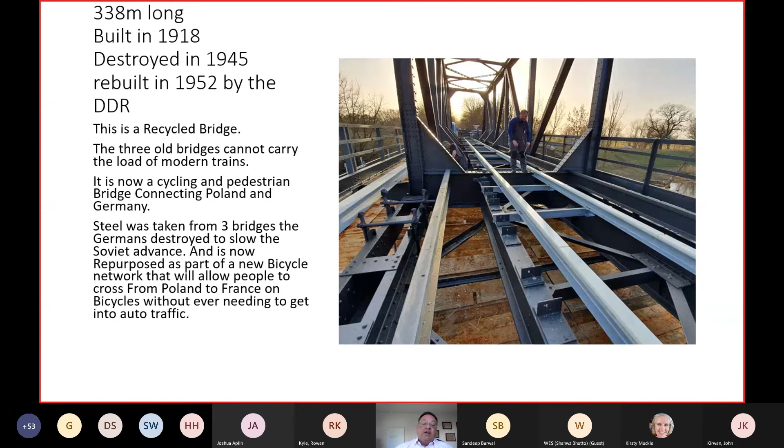What happened is we took 3 broken bridges and recycled the framework from those 3 bridges and put them onto 1 bridge, where the posts or the foundations are already in the river, so we don't have to go build new piers out in the river for the bridge. This is really kind of a wonderful example of recycling and the 3 R's: reduce, reuse, and recycle. We're reusing the trusses that were originally used for the trains, and we're putting them back up onto the bridge. We're reusing the existing piers in the water, but now what we're going to do is change the deck. We're simply replacing the surface from being a rail bridge to being a pedestrian and cycling bridge.

And this is really one of the wonderful things about this: we're now repurposing an old bridge that was once a rail bridge, and now it's being repurposed into a pedestrian and cycling bridge. So what we have here is this bridge—you look at it, you can see the different trusses from the different bridges that it came from.

But we never disrupted any of the flow of the river. No disruptions to nature preserves. We used existing structures that were basically no longer fit for their original purpose, so we repurposed them and built this bridge and gave it a new deck. And the entire cost of this is less than a tenth of building a new bridge from scratch.

This is where you make a really fantastic improvement in infrastructure, because no matter where you go, you're going to find decaying infrastructure that isn't fit for its intended purpose, but it can be repurposed. As we try to get people to be more clean and green, the problem is all our infrastructure in America was built around the car, but we want people to ride bicycles, and our infrastructure wasn't designed to accommodate them. This is where you can repurpose infrastructure to start accommodating cyclists and pedestrians.

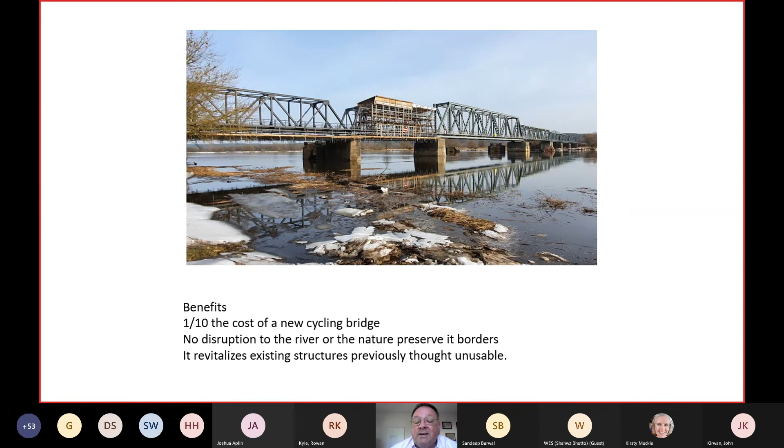I'm quite proud of this one, and it looks like there are a lot of other structures like this that we can do that with. This also makes the area more livable and more enjoyable, because with more bike paths, people discovered that business actually picks up—cyclists also spend money.

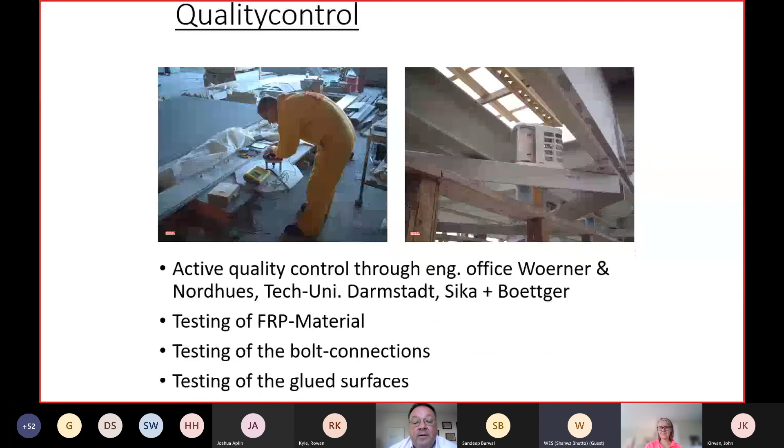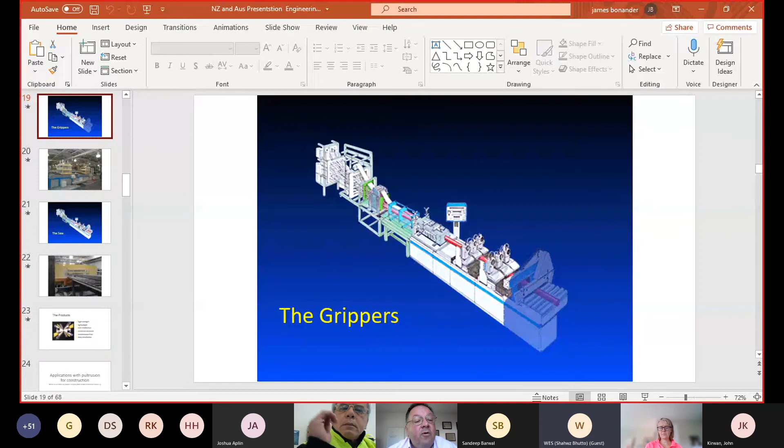What installation equipment was needed for the bridge that was flown to site by helicopter? How were the earth screws installed?

So what you do in the case of earth screws, for that application, is use what looked like a giant Spanish windlass—about five guys turning the screw into the ground. They sat there pushing this thing around by hand because we couldn't drive a hydraulic system in place. Aside from that, they hiked in, and we dropped off a set of wrenches and several electric drills with batteries. Each guy went through about four sets of batteries on the final installation, because after they put the earth screws in and bolted in the top of the abutment, all they had left was a set of anchors that they had to connect.

So there was very little work on their part. They had to use some electric sockets, or spanners as you call them, to drive them in, along with a set of torque wrenches, and that was all it took. The hardest part of all was just getting the helicopter stable enough to put it down in the right place because of the crosswind.

So basically it was 3 men on the ground who really did most of the bolting, but 5 guys to turn the earth screws, which was done a few weeks earlier.

All right, cool. And Ariana, I think she's requiring a bit more of a clarification about the earthquake situation. If you could highlight that again. Well, the fact is, earthquakes vary depending on where you go. So I'm going to talk about Oregon. We have several problems here. One, we have an earthquake problem, we have a spring flood problem, and we also have a volcanic issue, and we have the spotted owl.

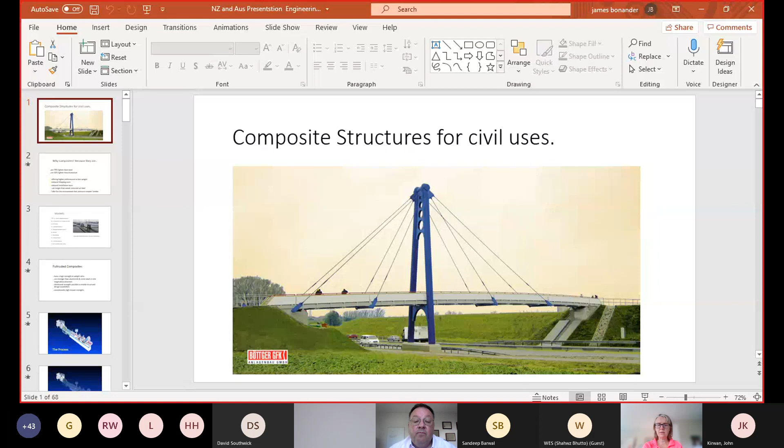Oh, there we are. We're still recording. Okay. So that's not bad. A few minutes to spare.